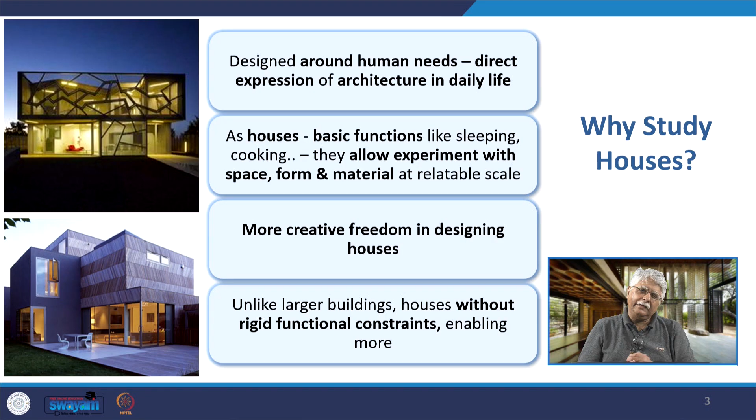If we want to analyze them collectively, houses reveal the essential truths about aesthetics, social dynamics and modernity. The design is around human needs, a direct expression of architecture in daily life. Houses, with their basic functions like sleeping, cooking, staying, allow for experiment with spaces, form and material at a very relatable scale. Most of the changes we have seen in the modern movement were first experimented with in houses. There is more creative freedom in designing houses. Unlike larger buildings, houses are mostly without a lot of rigid functional constraints, meaning we are able to do more within them.

There are pioneering movements like modernism, brutalism and many more, where houses or even apartment buildings are prototypes for new materials, new techniques and new spatial concepts. Iconic houses like the Steiner House, Maison de Verre, or the Glass House by Philip Johnson are labs for architectural ideas. They are small compared to public buildings, so experimentation is easier with respect to the cost and risks we take while designing or erecting buildings.

Innovative architects, from Frank Lloyd Wright all the way to modern architects like Peter Zumthor, have evolved their design language through houses, and later applied these ideas to larger projects. Houses reflect cultural values, technological advancement and social changes. Domestic architecture evolves in response to how people live. So the ideas were first tested in houses and then often used in larger architectural typologies.

Examples are the case study houses in post-war USA, which were influenced by mid-century suburban development taking place worldwide. They are also a reflection of socio-political realities.

Like Villa Savoye, its prefab nature and standardization was a reflection of socialism. Similarly are the prefab houses designed, and some constructed, by Walter Gropius. Falling Water is about individual freedom and democracy. Farnsworth House, by Mies van der Rohe, a German architect building in the United States, is a merger of American and European ideals. Villa Mairea by Alvar Aalto in Finland is about critical regionalism - a separate identity of Scandinavia within Europe, and a connection between modern and regional identity.

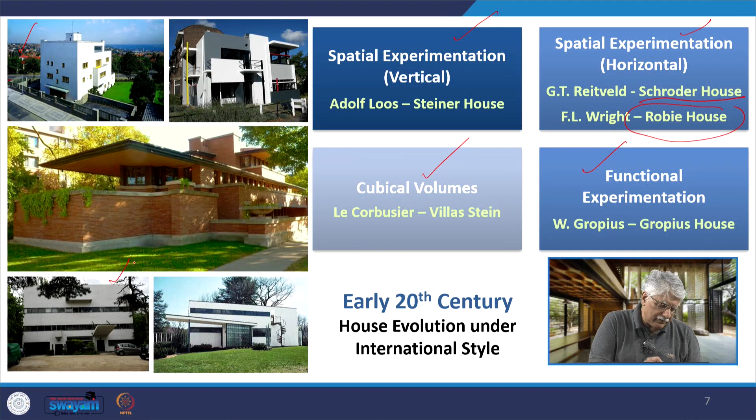There is spatial experimentation in the vertical direction, which we find in Adolf Loos's Steiner House, and here for example the Villa Müller - we will look at this house. Spatial experimentation in the horizontal direction we will look at in the Schroder House; we have already seen it earlier in F.L. Wright's houses like the Robie House. Then cubical volumes in Le Corbusier's houses like the Villa Stein, and functional experimentation in Walter Gropius's own house, the Gropius House. This is Villa Stein, Gropius House, Robie House, Steiner House, Villa Müller.

Adolf Loos, in his writing called Ornament and Crime in 1908, said there is a war declared on all superfluous decoration which is irrelevant to its age. Ornamentation is wasted manpower, wasted material, wasted capital.

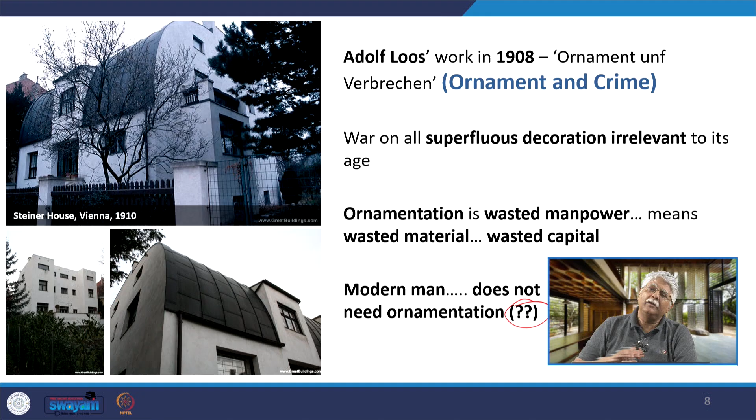Modern man does not need ornamentation. I put a double question mark here because Robert Venturi says exactly the opposite of it. He says ornamentations will never go away. So this debate will continue.

But Adolf Loos said, my architecture is not conceived in plans but in spaces, that there is no ground floor, no first floor, only continual spaces, rooms, terraces, etc. The stories merge and spaces relate to each other. Every space requires a different height.

The dining room is higher, pantry ceilings are set at different levels or lower levels. So what he did was he experimented by designing spaces and integrating or connecting them in the vertical direction with changing floor levels. The best way to understand the house of Adolf Loos is to look at the section of the house. Here we see this section shows how in this part, for example, the floor levels are changing. Interiors are interconnected multi-level rooms with space and height of each room suited to its function.

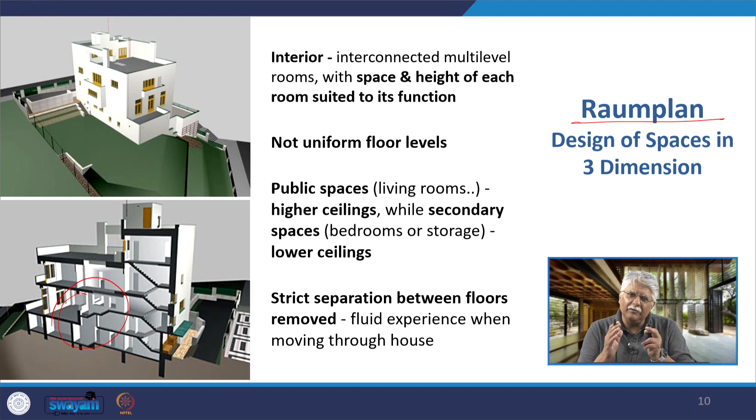This is called a Raumplan, design of spaces in the vertical or in three dimensions. There are not uniform floor levels. Public spaces have high ceilings, secondary spaces have low ceilings. The strict separation between floors has been removed, and there is a fluid experience as you move through the house.

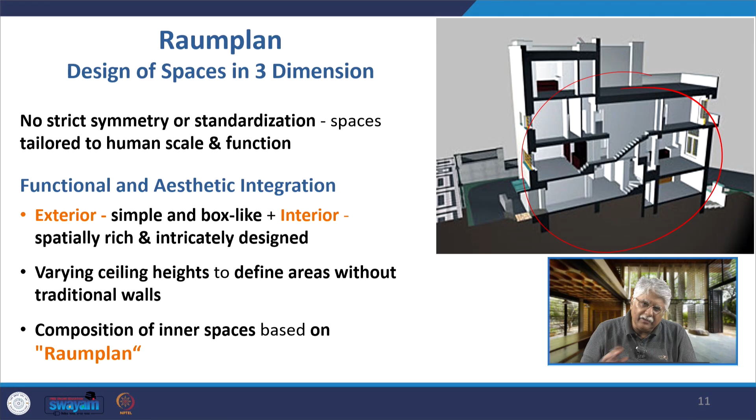This section shows the Raumplan more clearly. No strict symmetry or standardization. There is a functional and aesthetic integration. Exterior is very simple and box-like. We look at the picture again. Interior is very spatially rich and intricately designed with varying ceiling heights. This composition of inner space is based on the Raumplan concept.

This is the Villa Müller with the box-like outer appearance. So this spatial experimentation in the vertical direction - when we look at Wright, he talked about seamless transition between inside and outside, but Loos says the public outside and the private inside space should be as separate as possible. The building should be dumb outside and reveal its wealth from inside.

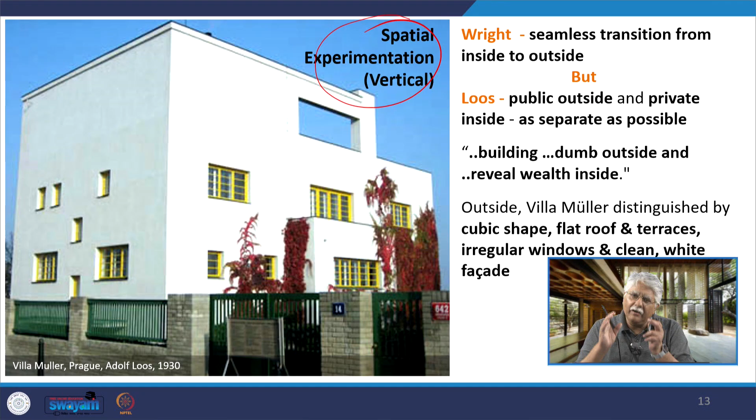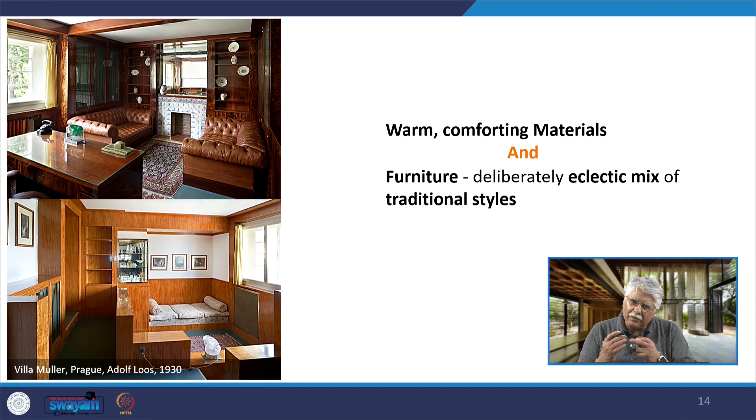So the outside of Villa Müller is a cubical box-like shape with flat roof, irregular windows and a clean white facade, as was true for the international style. But when you go inside, there are warm, comforting materials and furniture in an eclectic mix of traditional styles. The inside is so different from the outside, very different from Wright, who used to bring a connection between inside and outside.

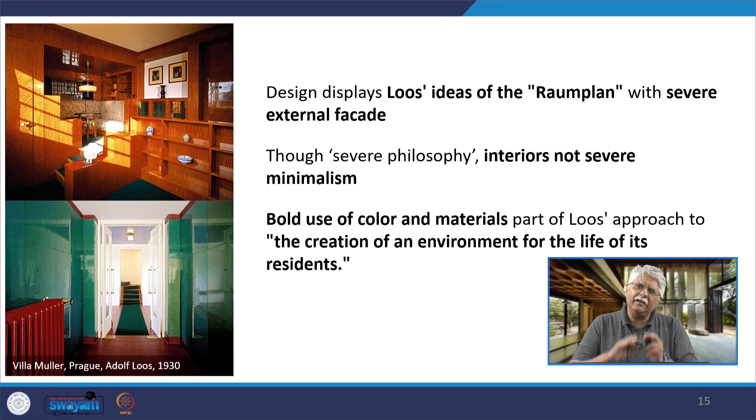The design displays his ideas of the Raumplan with a very severe external facade. This severe philosophy is not there in the interiors. Interiors do not have the severe minimalism we see on the outside, but there is a bold use of colors and materials. He creates an environment for the life of its residents inside the building.

These are some of the views of the interiors of the Villa Müller, and you can see the changing levels reflected here, and you see an eclectic mix of furniture - it's a very rich, vibrant interior.

This concept was applied later in other houses. For example, we see this in the Thurlow House in Australia by Harry Seidler. In 1952, the split level dwelling - you enter the house at mid level, part of the house is above and part is below that. The living areas, etc. are all connected by short staircases. You see this kind of level change as you saw in the Villa Müller pictures.

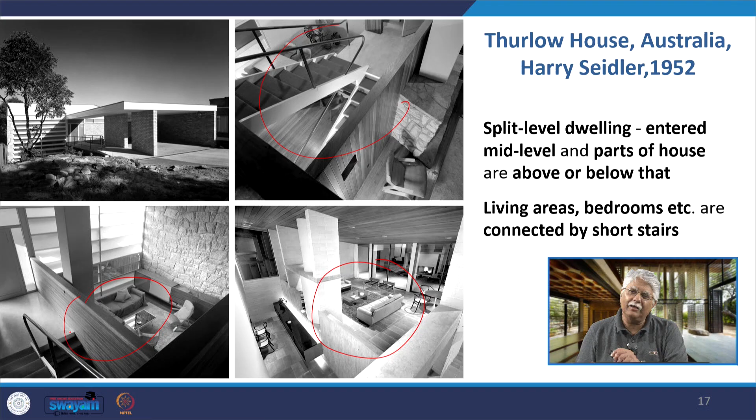Another example is the split level house by QB Design in 2009 in the USA, with multiple short flights of stairs. You find these staggered spaces, staggered levels which are interconnected to each other visually. Living spaces, bedroom areas are placed at different heights. So in the Raumplan, it's not about different floors but different spaces throughout the house which have varying heights.

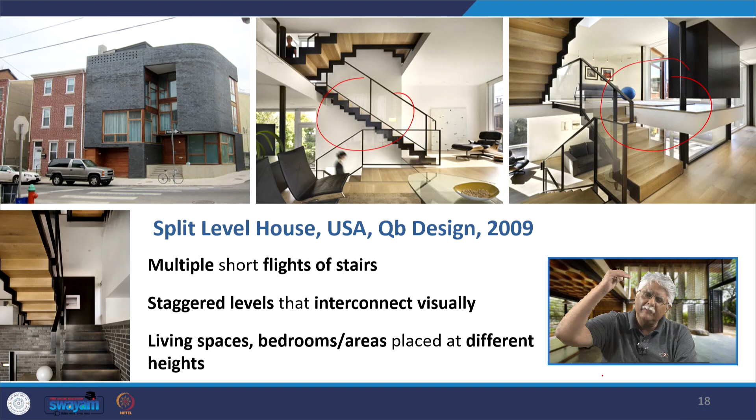This one in 1923, Usonian houses for the modern living, the changing lifestyle in America and across the world. The Kentucky Knob in Pennsylvania in 1956, and finally in the last years of his life, organic architecture. We saw that in Falling Water also, and the Norman Lykes house in Arizona in 1967.

The impact of the Prairie houses is that they brought a new domestic architecture with horizontal lines, low pitched roofs, and most importantly, open interior spaces with a free flowing plan.

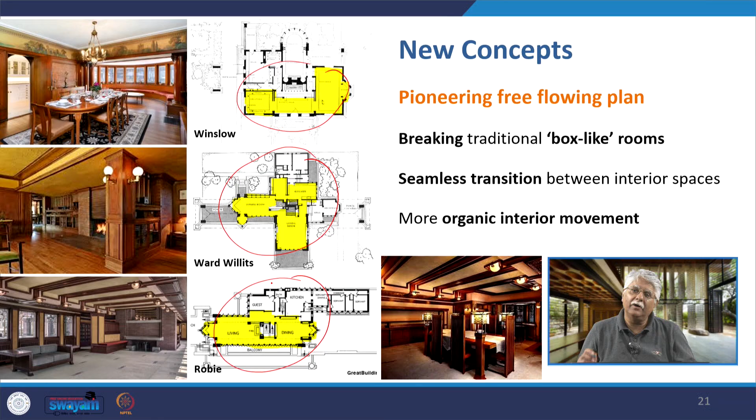This concept of a free flowing plan we find beginning with the Winslow house, breaking the traditional box-like spaces or rooms within the house, a seamless transition taking place, for example in the cross plan of the Ward Willits, leading to the linear plan of the Robie house with a more organic free flowing interior movement.

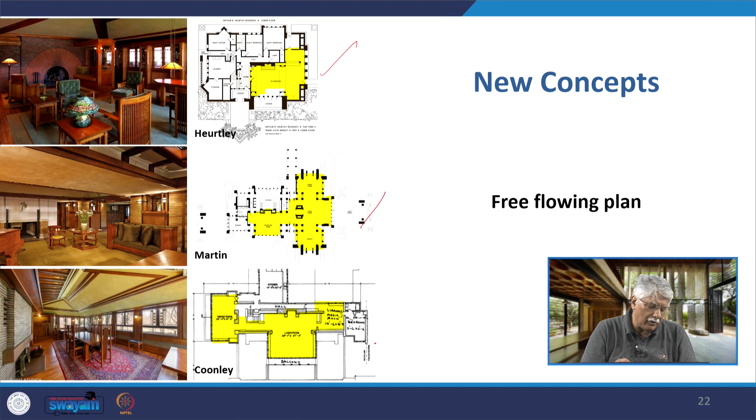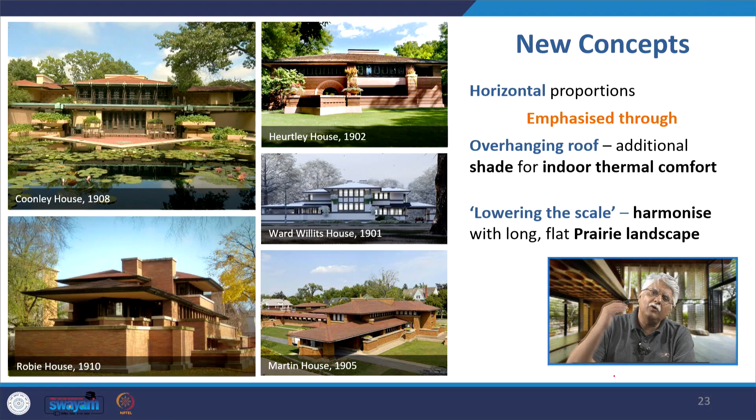This free flowing plan we find in other houses like the Heurtley house, Martin house, and Coonley house by Frank Lloyd Wright. These new concepts include horizontal proportions, overhanging roofs for additional shading and indoor thermal comfort, and overall lowering the scale to harmonize with the low-lying or flat prairie landscape.

The Robie House also had technical innovations for that time. The rim-like roof you see here not only emphasizes horizontality, but there are globe lights provided within it, with wires set into the ceiling.

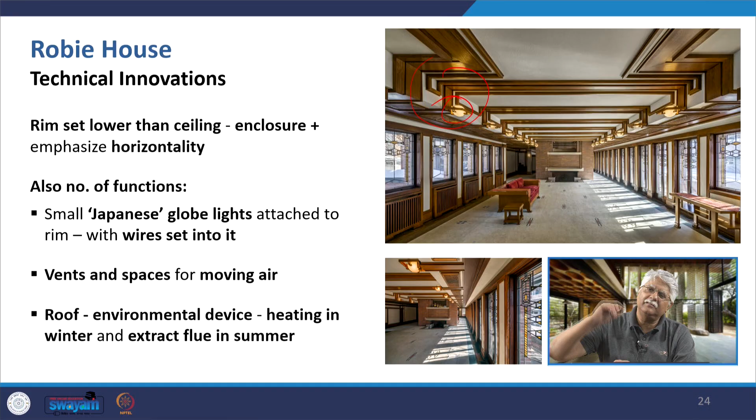There are vents and spaces in the ceiling for movement of air. The roof becomes an environmental device for heating in winter and as an extract flue for hot air in summer. These are the early stages of bringing technological innovations into house design.

He gave us guiding principles for house design. We will talk about some of them; we have seen this series earlier. Reduce the number of separate rooms to the minimum and make them all work together as an enclosed space. It should be a free flowing plan, so divided that light and air permeate the whole house.

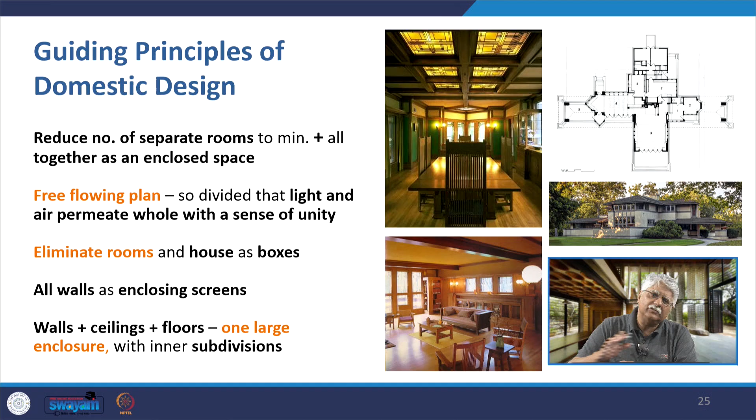Eliminate rooms and houses as boxes. All walls work as enclosing screens, an idea that comes from Japanese traditional architecture. Walls, ceilings, and floors are one large enclosure with internal subdivisions.

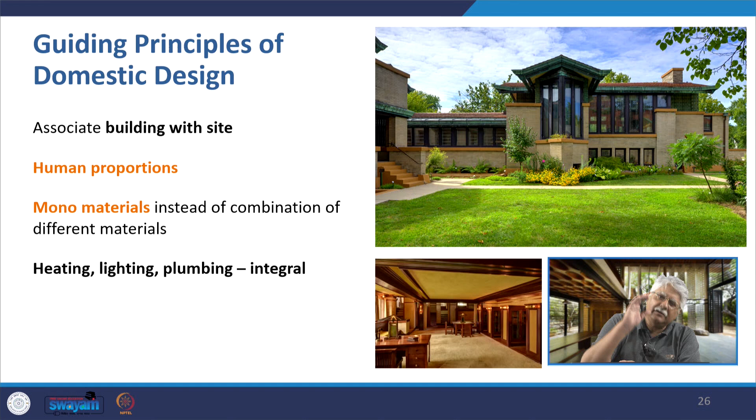Associate the building with the site, make it with human proportions. Use mono materials instead of a combination of different materials. There should be heating, lighting, and plumbing integral to the house. Furnishings should be one with the building, designed for machine work with straight lines in rectangular forms.

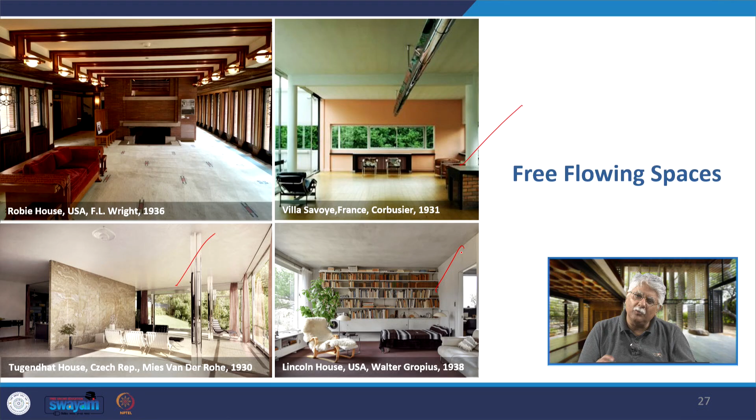We find these free flowing spaces then coming into the modernist houses of the early 20th century, in the Villa Savoye, the Tugendhat house, the Lincoln house, and the Gropius house. We have seen these examples earlier.

Another thing I'm trying to do through my slides when I indicate these aspects is to increase your architectural vocabulary of buildings, so you are able to see many buildings I'm not able to talk about in detail in these presentations. For example, the Therme Vals by Peter Zumthor is an iconic project, but I am just showing you a glimpse of it. Please make an effort to read about these projects online or through a book.

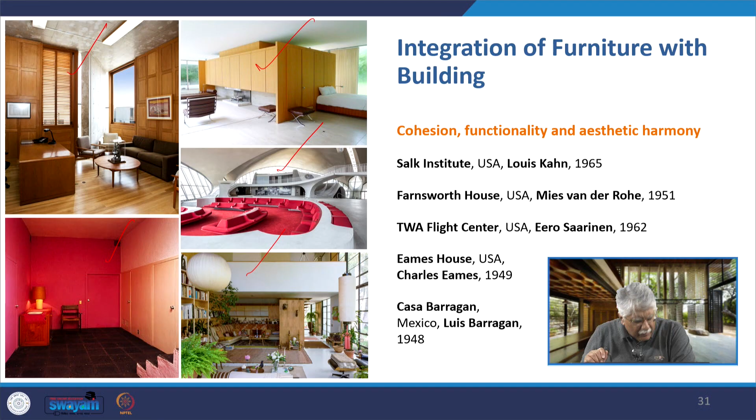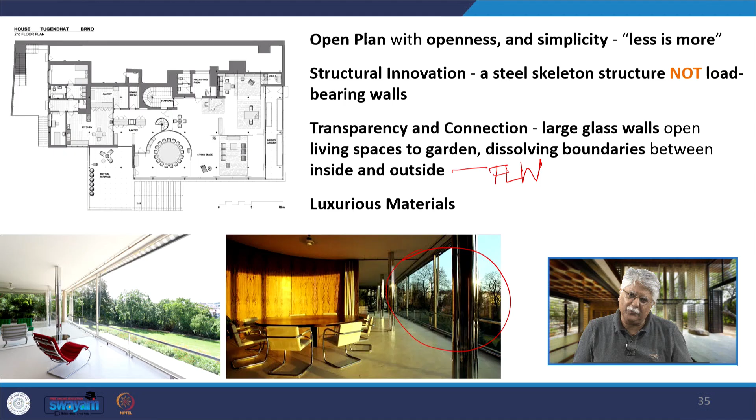These are some pictures of the Tugendhat House, showing the interiors and exteriors. You see this extended glass wall opening towards the garden, here in the time of winter. This shows the other side of the Tugendhat House, where you enter. The other interiors show the extensive use of glass to connect with the outside.

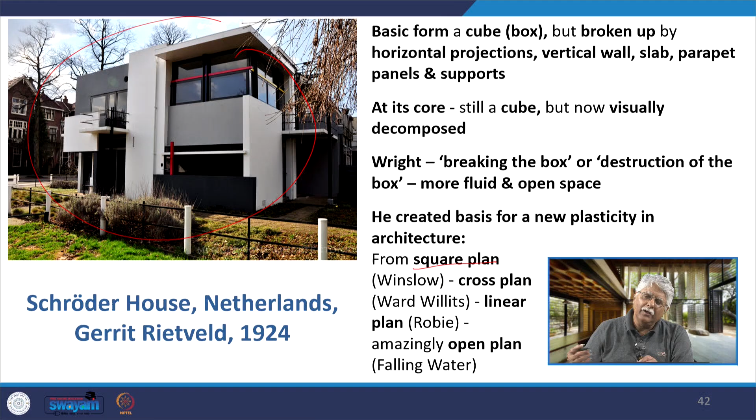This whole idea of breaking or destroying the box to create more fluid and open space was the idea of F.L. Wright, who created this basis of a new plasticity in architecture. We find that evolution in his work, as I showed you in the previous slide, from the square plan of Winslow to the cross plan of Ward Willits, the linear plan of Robie House, to the amazingly open plan of Falling Water.

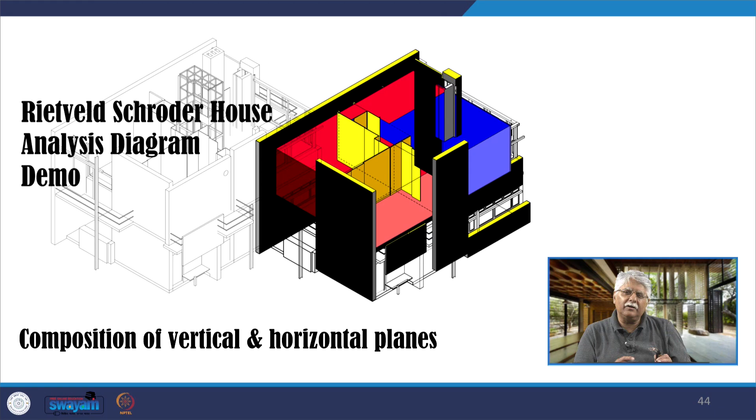So the Schröder House was spatial experimentation in the horizontal direction, like the works of Wright, with De Stijl aesthetic: very flexible interiors, connection with the outside through large windows and even corner glazing, and this composition of vertical and horizontal planes. Now you will find that many of these ideas are being repeated.

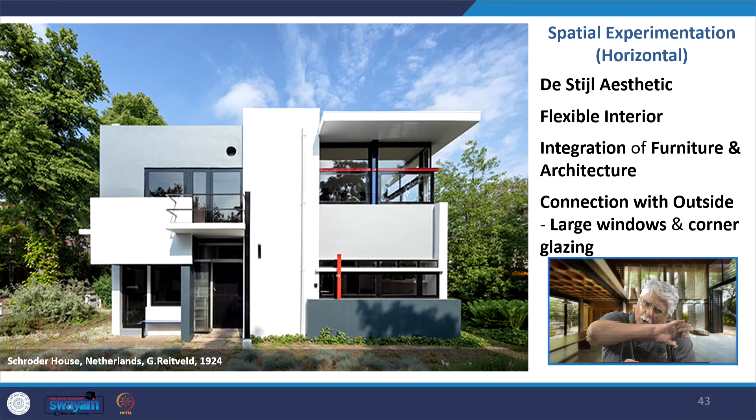Because when we talk of large windows and corner glazing to connect with the outside, we have talked about that in the works of Mies also. So it became a common trend throughout the international style. These are the flexible interiors with large windows of the Schroder House. This is De Stijl art.

So the actual movement began in the world of art and then carried on into the world of architecture, with this integration of furniture and architecture, and De Stijl colors and style within the house.

Thus we have seen earlier that when we talk of a new architecture, it all came out of house design initially: Wright's propositions, Corbusier's five points of a new architecture, Mies' various elements used in construction like steel, glass, stone, etc., and Gropius's focus on functional planning.

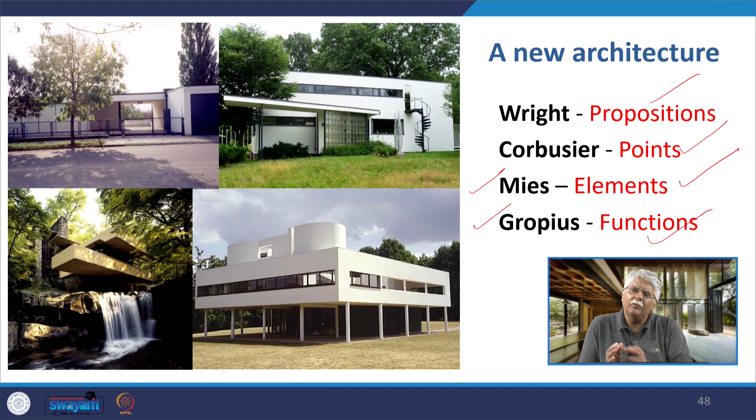Of course, two of them began experimentation in buildings other than houses. In Gropius's case, we find that in the Bauhaus, and in Mies's case, we find that in some early houses and then more prominently in the Barcelona Pavilion.

Then we have the Villa Schminke in Germany by Hans Scharoun. These are some examples I haven't talked about earlier, but they are part of the international movement. Here the house was rotated by 30 degrees around the axis.

The entrance stairs and utilities face the southwest side. Hans Scharoun, though part of the international style, rejected Le Corbusier's idea of the machine for living model. Instead, he said he was creating a house for living in freedom, light, openness, and connection to nature. This is called expressionist functionalism.

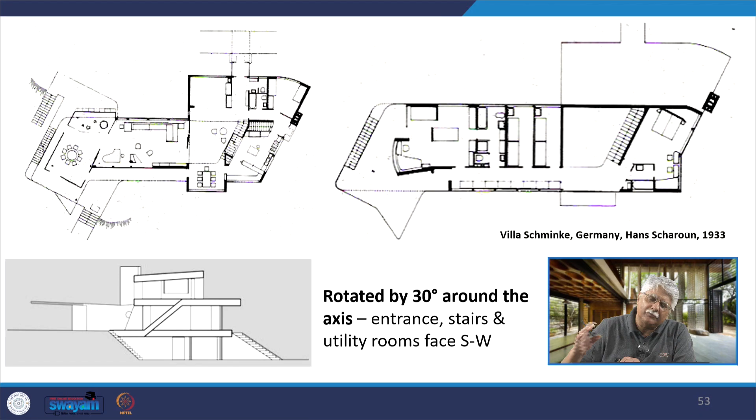There doesn't seem to be much difference from the international style, since those houses also had light, openness, and connection with nature. But the way this house was put together, how dramatically the axis changed, was different from the box-like approach of the early international style houses. Here we find the hall connecting all the stories, joining the functional part of the house to dining and living.

So there are some attractive results coming from these controlled fractures and curvatures, which was a unique example in the international style series, this house by Hans Scharoun.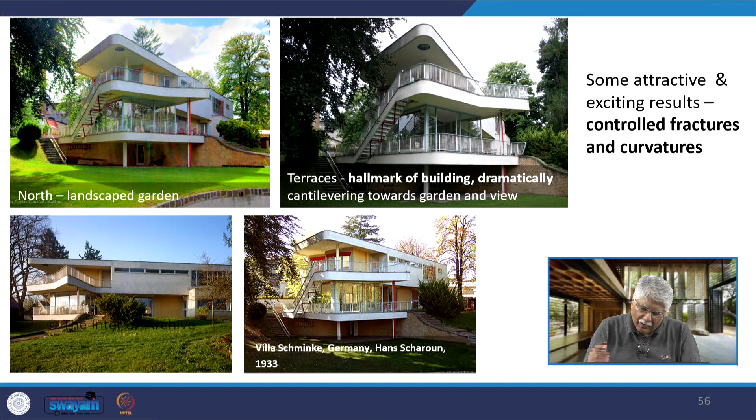The terraces are the hallmark of the building, with dramatic cantilevers, and the terraces are mirrored in the pond. During the night a different atmosphere is created by a range of purpose-designed lamps in the ceiling.

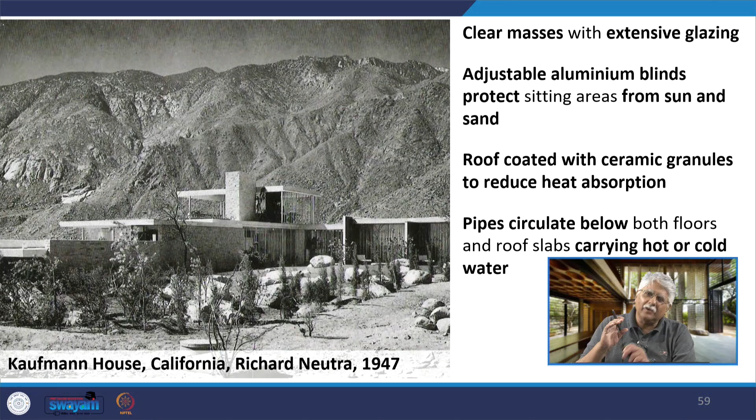Then we come to the Kaufmann house, with clear mass, extensive glazing, built in the hot, desert-like climate of California. Adjustable aluminium blinds protect the sitting areas from the sun and sand. The roof is coated with ceramic granules to reduce heat absorption, and pipes circulate below both floors and roof slabs carrying hot or cold water.

So in fact there are two Kaufmann houses: this one designed in the desert of California by Richard Neutra, and the earlier Kaufmann house, generally known as Falling Water, by Frank Lloyd Wright in the dense forest of Pennsylvania in 1936.

This house has a pinwheel plan. If you want to know another pinwheel plan, look at the Ward Willits house—here we have an example of the pinwheel plan. The similar example is here in the Kaufmann house, and also in the brick country house of Mies van der Rohe.

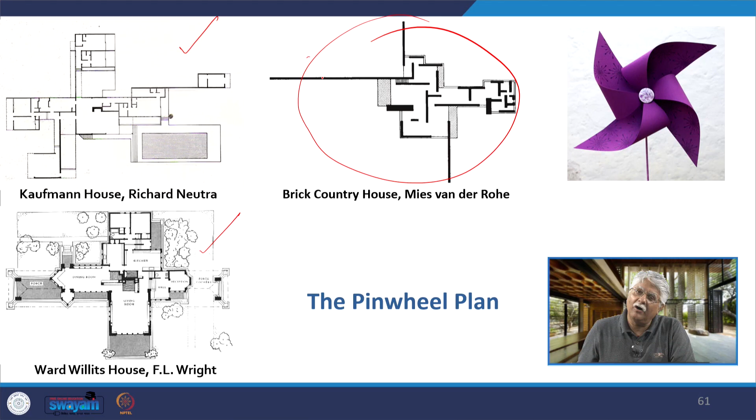The design is simplistic. The central living and dining room is the heart of the house. The rest are branches, like a pinwheel, each in a cardinal direction—east, west, north, south. Each wing branches out with its own specific function. The most important aspects are oriented east and west; supporting features are oriented north and south.

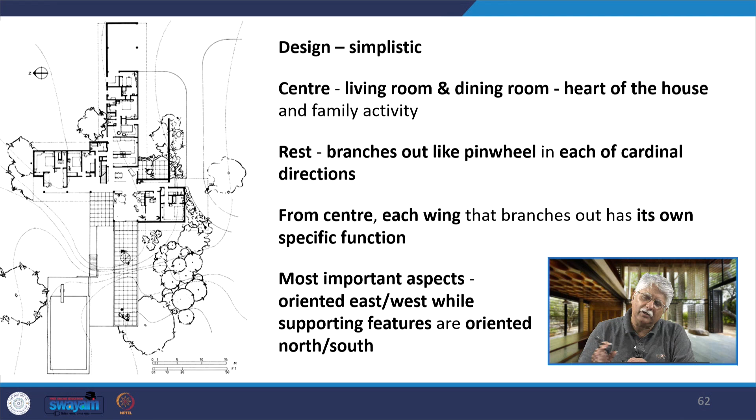This is the Kaufmann house. When the sliding glass doors are opened, the differentiation between the internal and external parts of the house disappears. There is a flowing space—Richard Neutra had learnt this under Frank Lloyd Wright at Taliesin.

So this spectacular view is what we get in the Kaufmann house—this is the landscape of the Kaufmann house. And then one of the most iconic features is the swimming pool, which creates a compositional balance in the overall design.

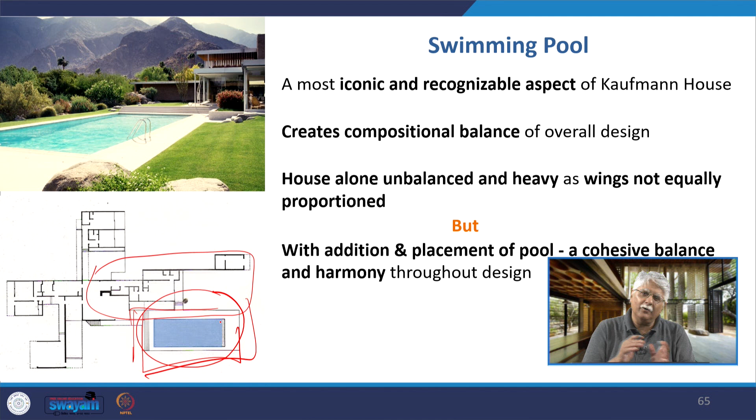The house without the pool seems unbalanced and heavy, as the wings are not equally proportioned in the pinwheel design. But with the addition and placement of the pool, there is an entire cohesive balance and harmony throughout the design. Remove the pool and the house looks unbalanced—this side seems way too extended. Put the pool here and the house achieves a kind of design balance.

These are some other pictures of the Kaufmann house. And then there is the Farnsworth house, which I have already talked about in detail.

This was designed for Dr. Edith Farnsworth—an iconic glass and steel weekend house, international style, Mies's idea of minimalism, with 8 I-section columns on which the entire house stands.

So we compare his earlier work to the Farnsworth house. In the Tugendhat house of 1930, we find the same minimalism that appears later, in the 1950s, in the Farnsworth house. The open floor plan of Falling Water in 1936 again appears in Mies's work in the Farnsworth house of the 50s, and also in the earlier project of the Tugendhat house.

Now let us come to the case study house program. The case study homes focus on the use of new materials and technologies that were developed in World War II for the war effort. The intention is to make the house out of prefabricated materials that would not interrupt the work on site, because the materials are manufactured in the factory, shipped on site and assembled, easy to build, exhibiting a modern style.

One of the examples is Charles and Ray Eames House in Los Angeles. Now, in the University of Southern California, the School of Architecture became a hotbed of new ideas as a result of the World War.

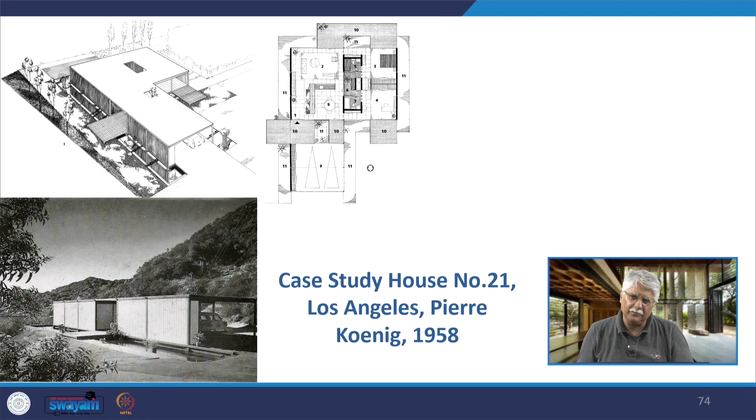In Case Study House number 21, the orientation of glazed walls is north-south, and solid walls is east-west. So we have north-south glazed, east-west solid. The most interesting part of the house, the basic design element, is this island created in between.

This island has the washroom, and it divides the living area from the 2 bedrooms. By disengaging the bathroom from exterior walls and facing them onto the court, the curtain walls become very simplified and you get complete glazing along the north-south direction. It completely changed the concept and way the bathrooms were to be located.

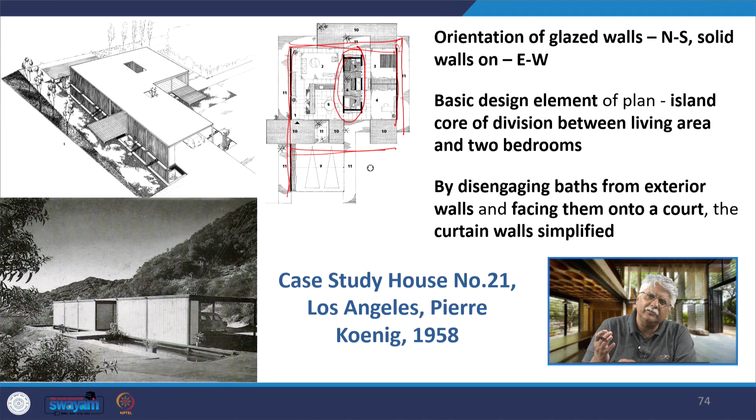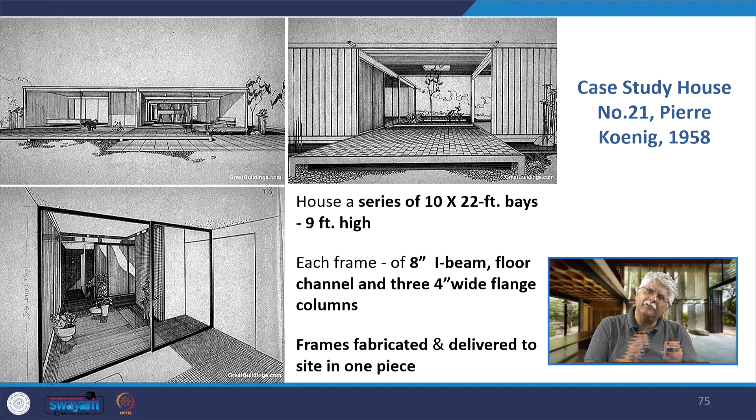The entire house is a series of 10 by 22 feet bays which are 9 feet high. This is how each frame has been put together, and the frames are fabricated and delivered on site in one piece and then assembled. Another important aspect of the house is that it is completely surrounded by pools of water.

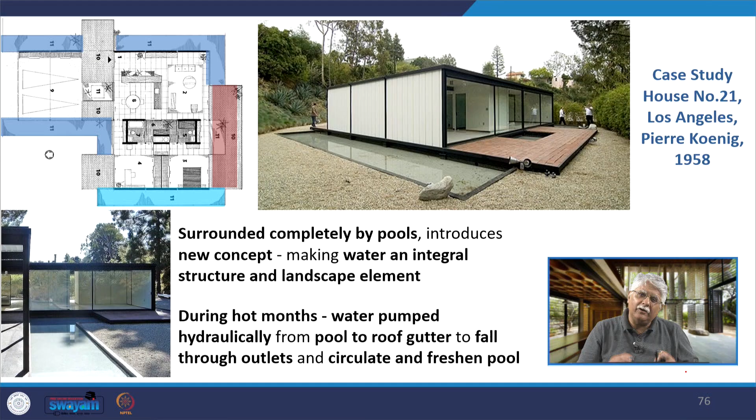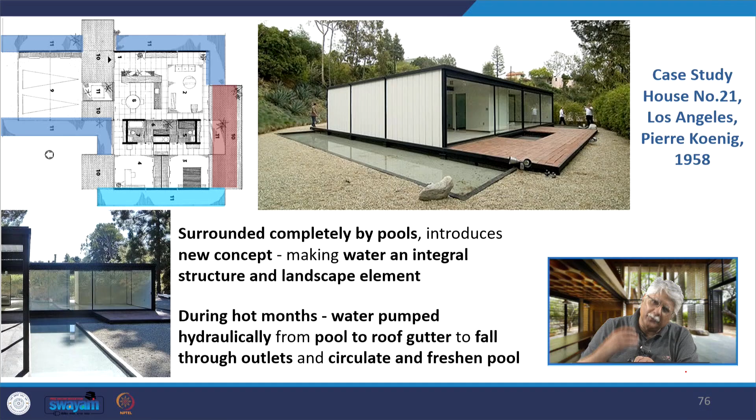This introduces a completely new concept in making water an integral part of both the structure and the landscape. During the hot months, the water is pumped hydraulically from the pools to a roof gutter. From the roof gutter, through outlets, it falls back again, is circulated, and freshens the pools again. These are some of the pictures of Case Study House number 21.

Similarly, we find different 20th century houses which have similar profiles. The original ideas of the modernist international style houses got replicated in later houses also in the 20th century. Not only do we find that in the Farnsworth house, but in much later houses like the De Blas house by Alberto Campo Baeza, and the Koehler house in Canada by Julie Snow.

I am making an attempt to show you more buildings so that your architectural vocabulary gets extended, though we may not be able to talk in detail about some of these projects.

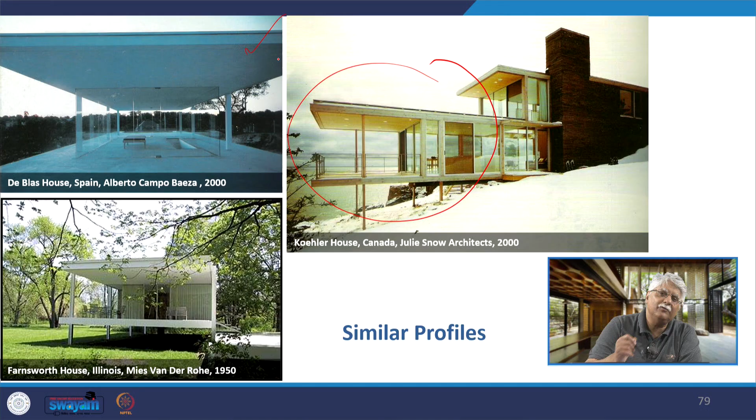In Julie Snow's house, it has a similar profile to the Farnsworth house. You find that very clearly in the way the house has been designed. Farnsworth house is from the 1950s, Julie Snow's house from 2000. In fact, Julie Snow's house seems to be a combination of two buildings. Not only does it resemble the Farnsworth house in the way the whole structure has been put together, it also resembles the cantilevered plates of Fallingwater.

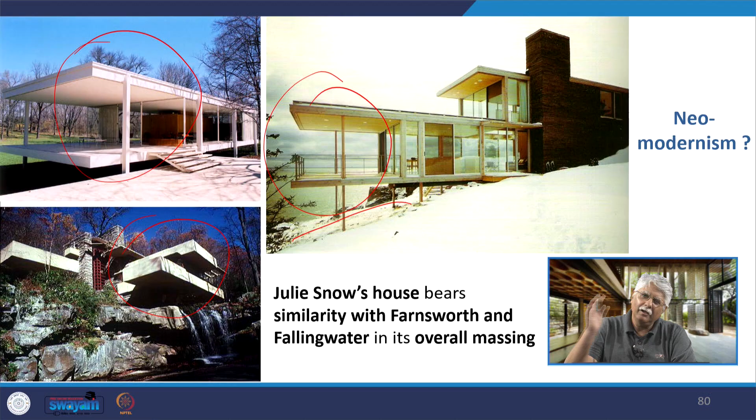As you see, it is on the side of the slope. So Julie Snow's house bears similarity, seems to be a combination of the Farnsworth house and Fallingwater in its overall massing. Is this an example of neo-modernism? I leave it as a question mark. Neo-modernism means a revival of modernism in the 21st century.

I will stop here, and we will start the next series where we will see another case study house by Pierre Koenig, called the Stahl House, and several other series as we go from the 20th to the 21st century, seeing a series of houses by iconic architects. Thank you.